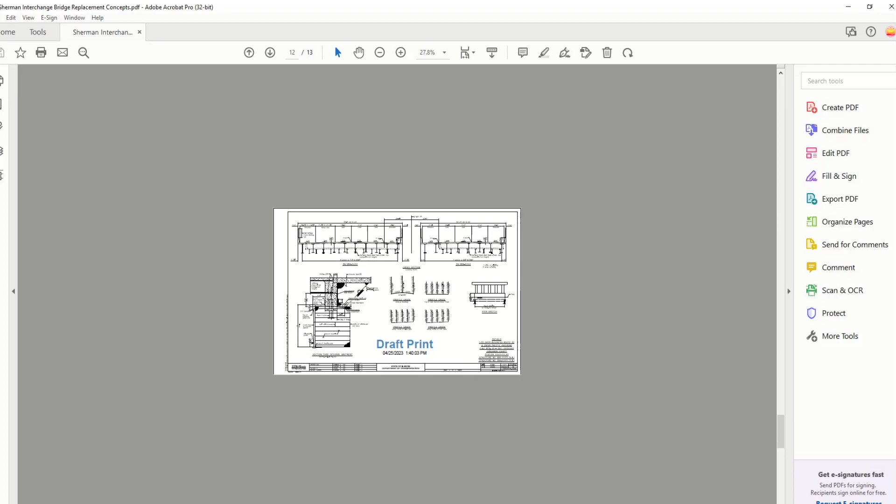And we can take a look at that here. As you can see, the railroad right-of-way is 50 feet wide on each side of the railroad, and you can see that the current plan is to place the piers in the same footprint as the existing.

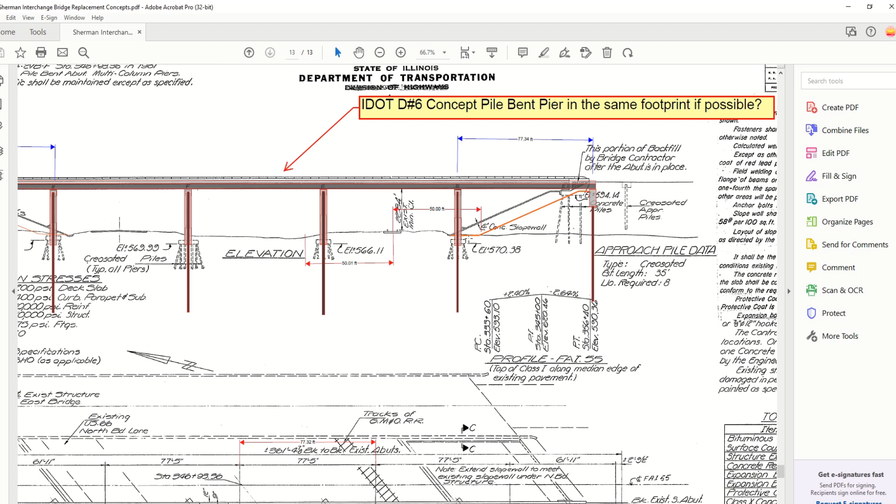The situation is that the railroad would prefer that the piers be off railroad right-of-way, and so IDOT needs to take a look at what that would take and what the impacts of raising that profile would be. And so in order to do that, we used the ORD software, modeled the entire interchange, including the main line, the bridge itself, and then the 3 interchange ramps.

We're then able to store a profile that gave us enough clearance above the railroad track to the low beam elevation, and we did a cost comparison. We're not looking at every single item. We're really just looking at the main impacts, and that main impact would primarily be the earthwork, the additional fill, the additional height on the retaining wall, and then the additional structure cost.

So let's take a look at how we went about that. What we did was we just took the existing profile, kept the same VPIs, which are near Andrew Road and Sudduth Road, and then we just increased the elevation to give us 3.25 of additional clearance. We kept the same vertical curve length.

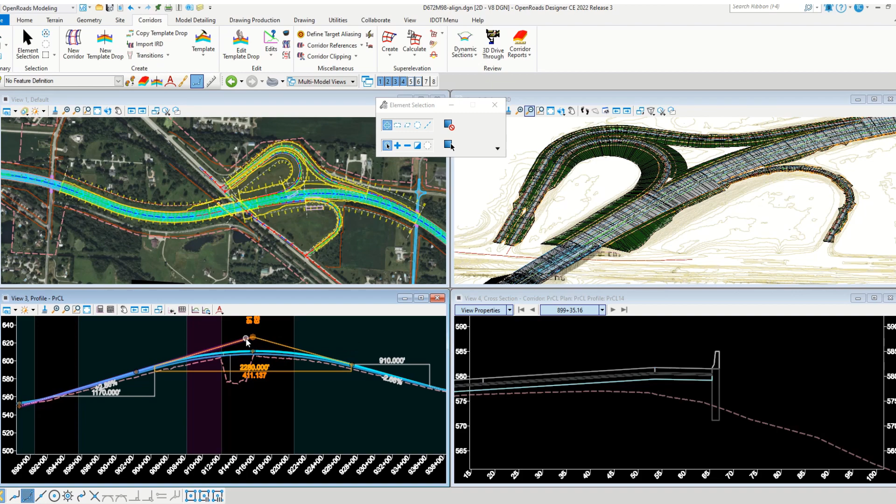We then make that the active profile, and then we apply our templates against that profile, which then produces a 3D model within multiple corridors, and then the corridors will give us the earthwork calculations. Okay, so let's take a look at the 3 or 4 templates that we used on this interchange.

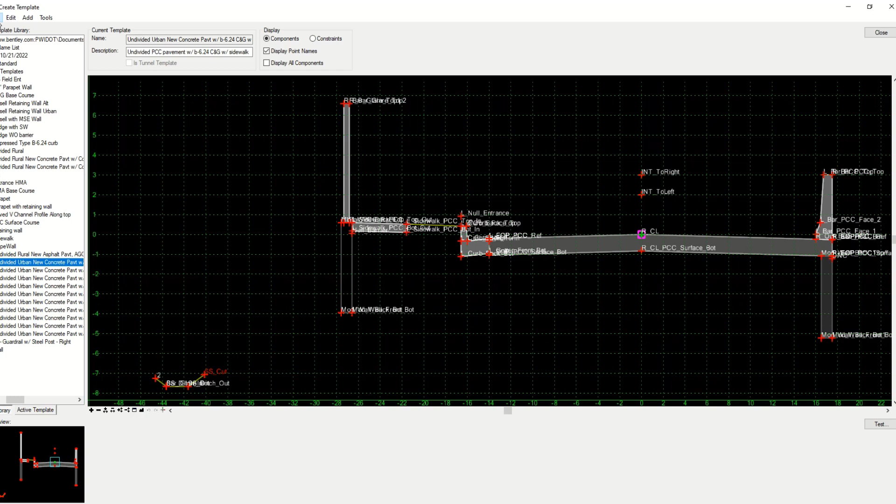Okay, so this is, actually that's our second corridor. Let's take a look at the first one. So this is the template that we applied against the first corridor. What we have here is the roadway PGL is located 17.5 feet from the center line.

So we end up with a total 16-foot shoulder, and then three 12-foot lanes, the first being 1.5%, the second 1.5%, the third then 2%, with the outside shoulder being 4%. The pavement type is PCC, 4 inches of BAM, and then we've got another 12 inches of subbase.

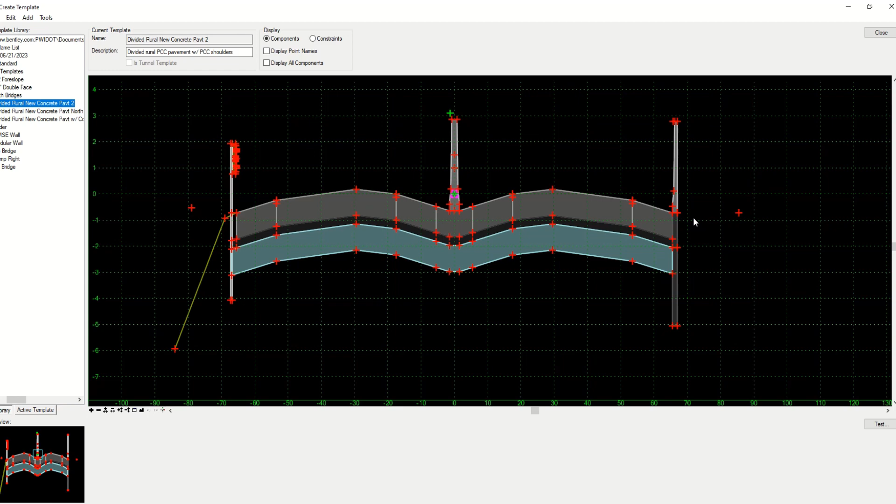On this first corridor, we've got an MSE wall, and that MSE wall targets the existing ground and then goes down an additional 3 feet. Let's see. The second template that we're going to be using is north of the bridge, does not contain an MSE wall, all the same widths. The difference being you've got this barn type foreslope

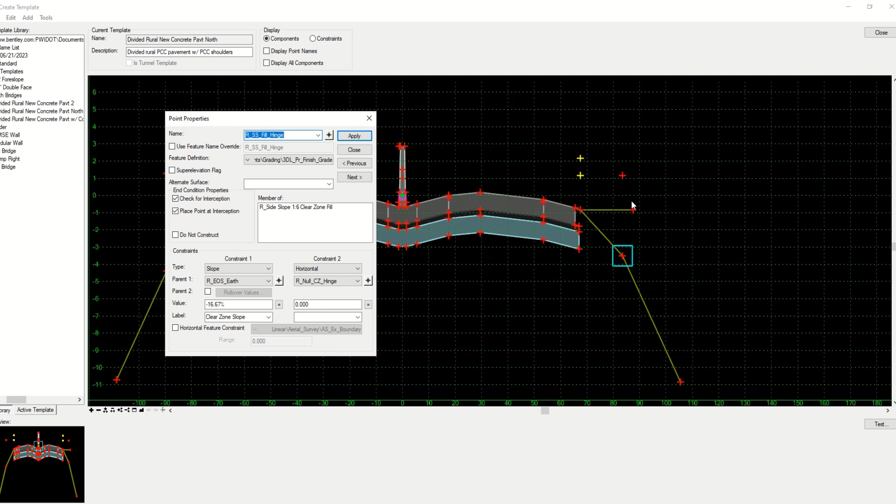where we go out at a 1 to 6, 30 feet out from the edge of pavement to the clear zone, and then we end up with a 1 to 3 down to the existing ground. We also have some additional pavement to handle the southbound entrance ramp transition.

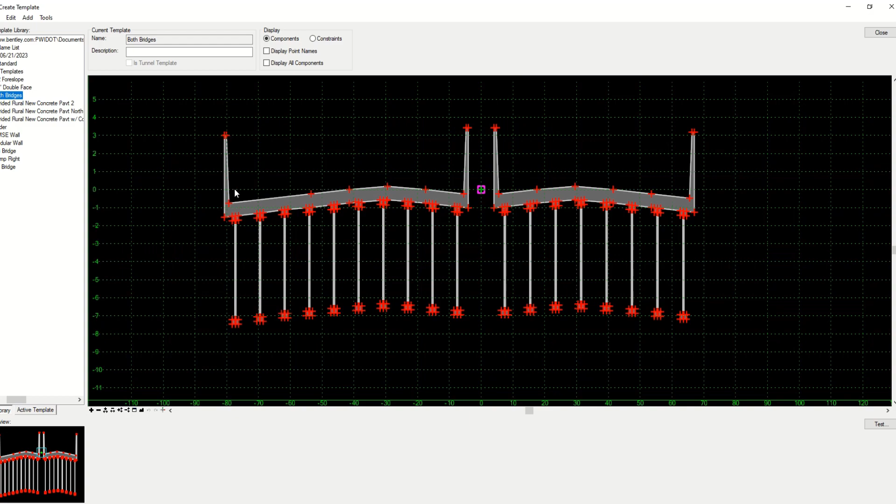We also modeled the bridges. The bridges are basically the same as the roadway. That inside PGL is 17.5 feet, the same as the roadway. There's no jog in it. Of course, the bridge has to be wider at the southbound entrance ramp, and so that's why you see this bridge on the left being wider than the one on the right. We've got a beam depth of 72 inches.

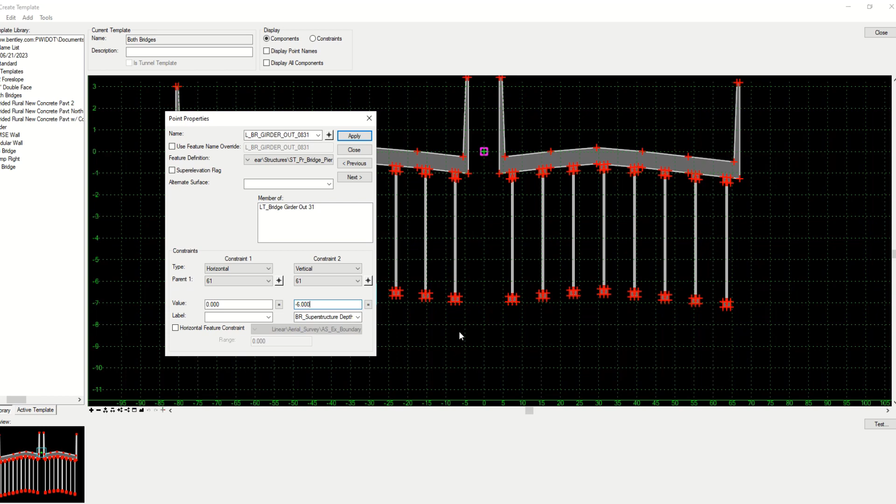And we're first going to run this against the corridors to get these quantities first, and then we'll come back, we'll change that to the 33 inches and adjust the profile.

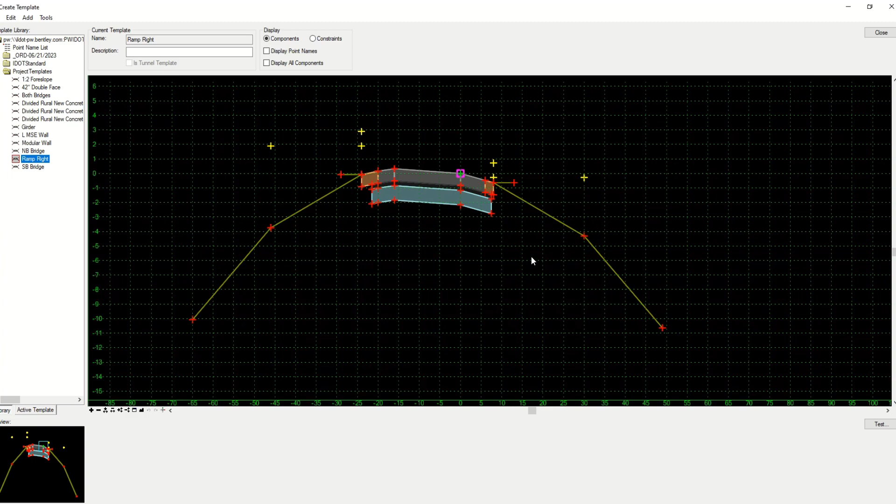And then lastly, we have the ramp template, and there we've got 16-foot pavement. We've got 6-foot shoulder on the inside. We've got 4-foot shoulder on the outside.

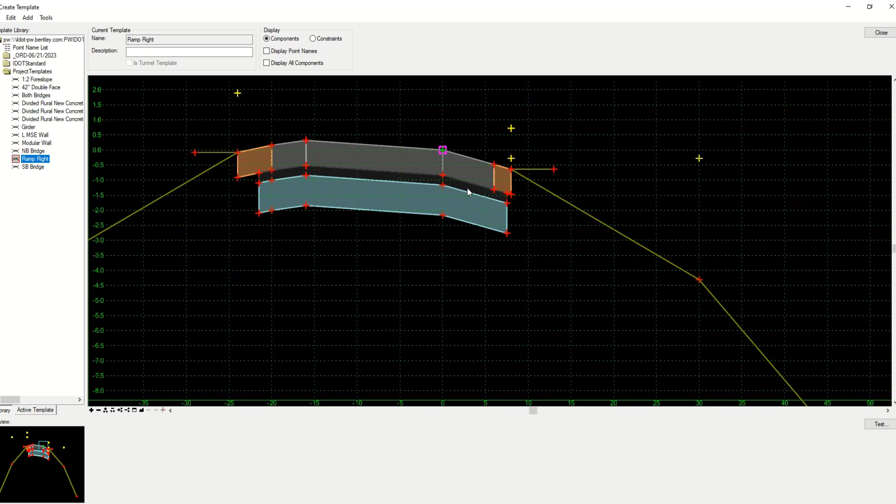And that's, like I said, 10-inch PCC, again with 4 inches of BAM, 12 inches of subbase. Again, we've got that barn style foreslope where we go 1 to 6 out to the clear zone, and then 1 to 3 down to the existing ground. So those are all the templates that we're going to use. So I'm going to close out of that.

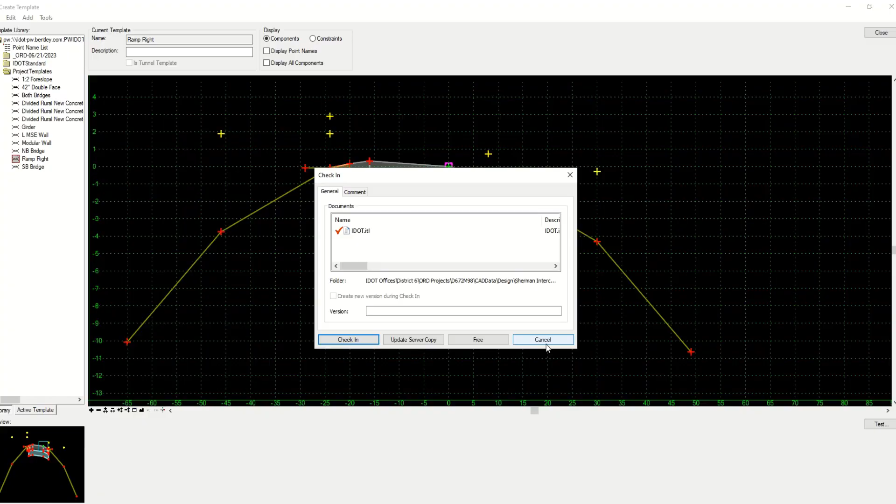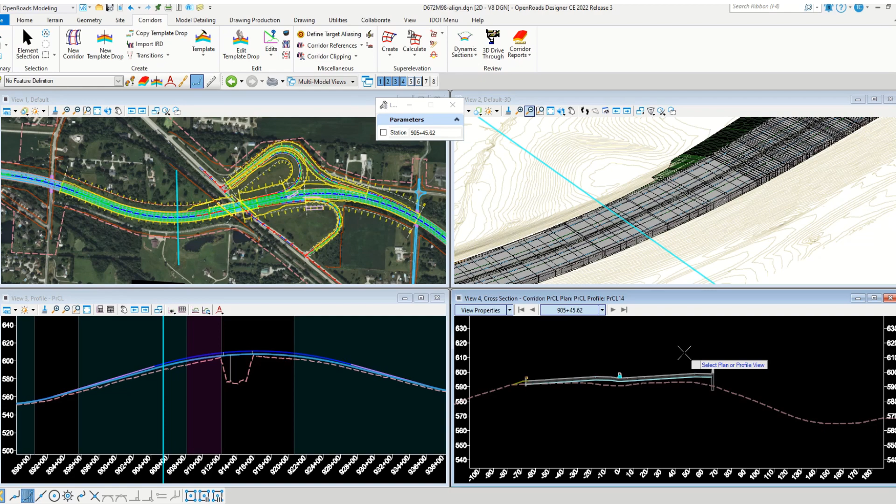And we'll just take a look at this very first corridor from Andrew Road up to the bridge. We'll move in and visualize a cross section somewhere close to the bridge. And you can see our situation here. Again, we're looking at raising that profile 3.25 feet.

So again, the top profile is the active profile, so that's what you're seeing here. That's that blue dot right in the middle. And then the inside edge of pavement that is 17.5 feet out is the same elevation as the PGL.

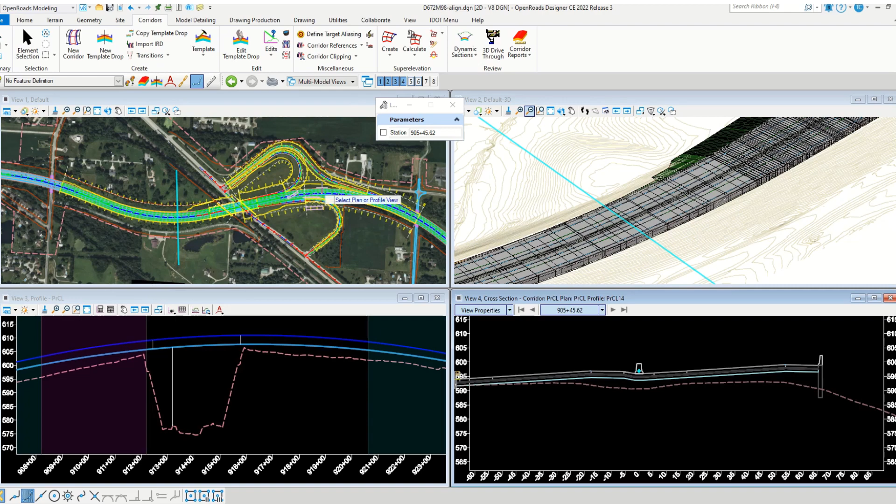So we go ahead and apply that template that we just looked at against the south corridor. And then after that, we ran our super elevation. Turn that on for a second here. The super elevation. This is the north one anyway. And we calculate our supers, which includes both the pavement itself plus the rollover for the shoulders, and includes transitions.

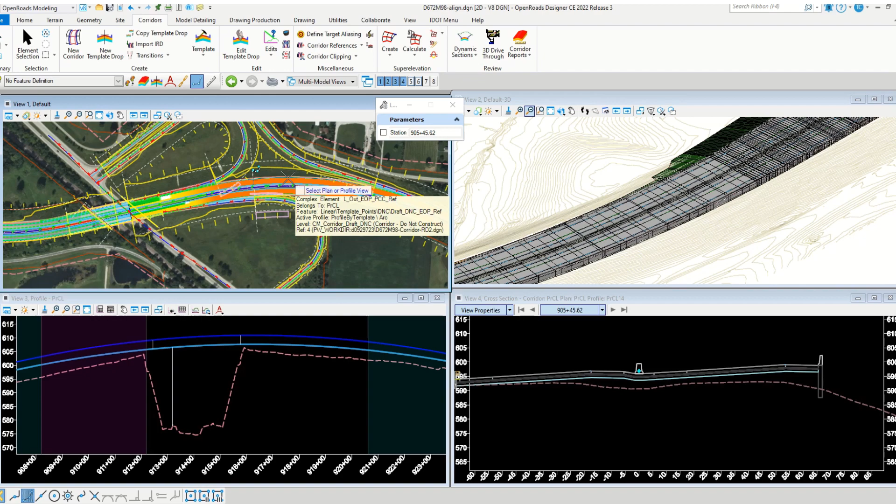So given this radius and design speed, we ended up with a 6% cross slope at a 75 mile per hour design speed. Okay, so let's take a look down here at the cross section, and you can see that in the model up above. There's the MSE wall.

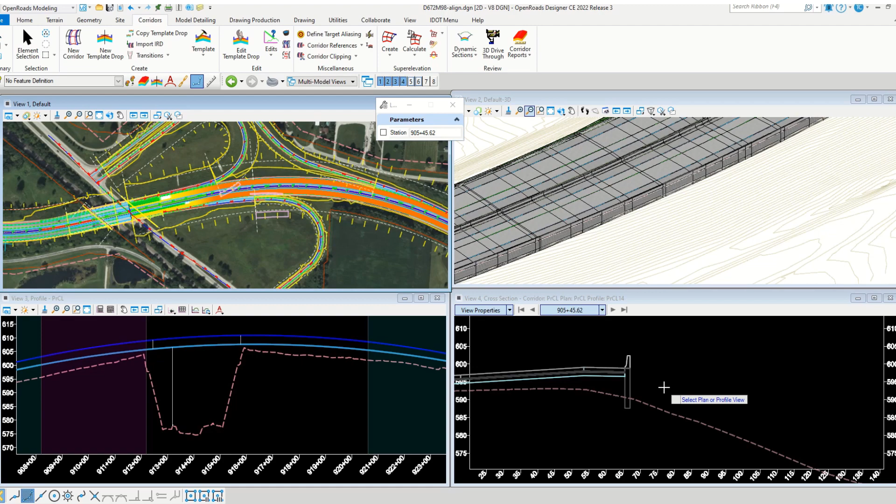You can see with raising the profile, we end up with an MSE wall height of, at least at this station, what do we have here? We'll measure that. So 11.2 feet. So that's, again, much higher than the other profile.

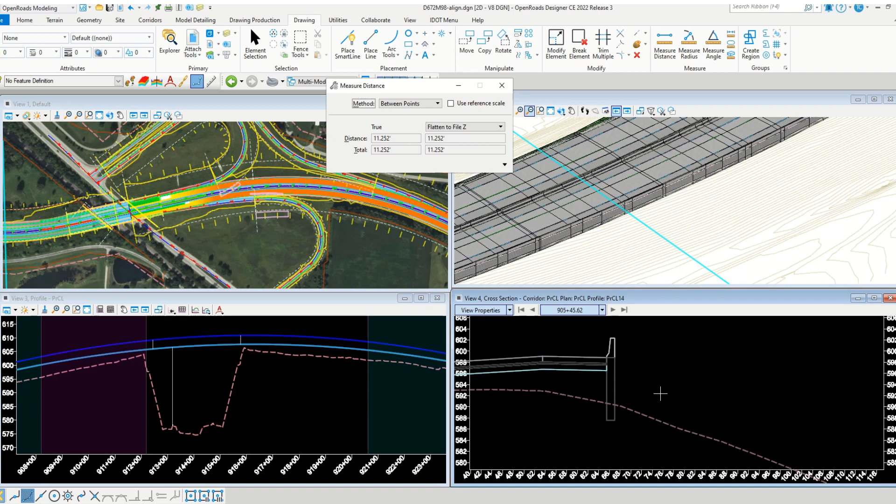So that's part of where that additional cost is going to be, in all this additional fill and then the raising of the MSE wall. And that MSE wall runs almost all the way to Andrew Road and then ends at the bridge.

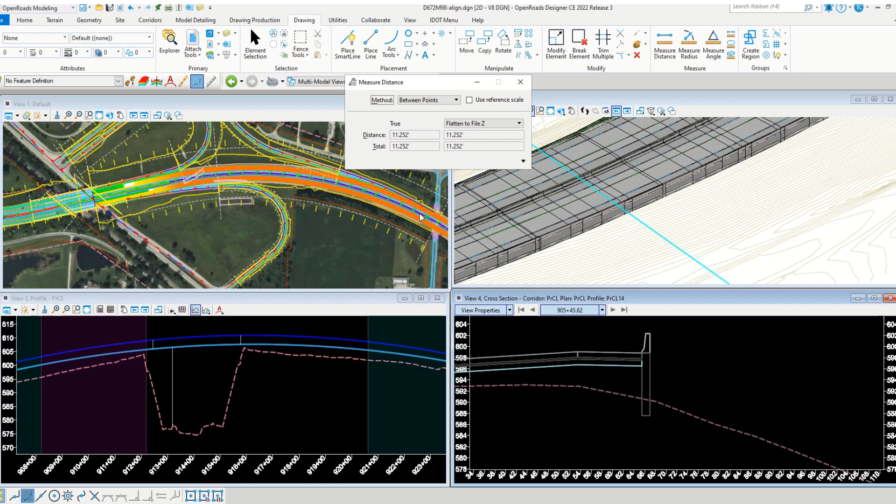And so then what we do, once we've processed this, we can just go into our corridor reports. We can select that full corridor, and that will give us our volumes, so our cuts and our fills. And you can see in this case we got 5,500 cubic yards of earth excavation and 43,000 cubic yards of furnished excavation. So we plug those into our quantities, and we'll come back to this later.

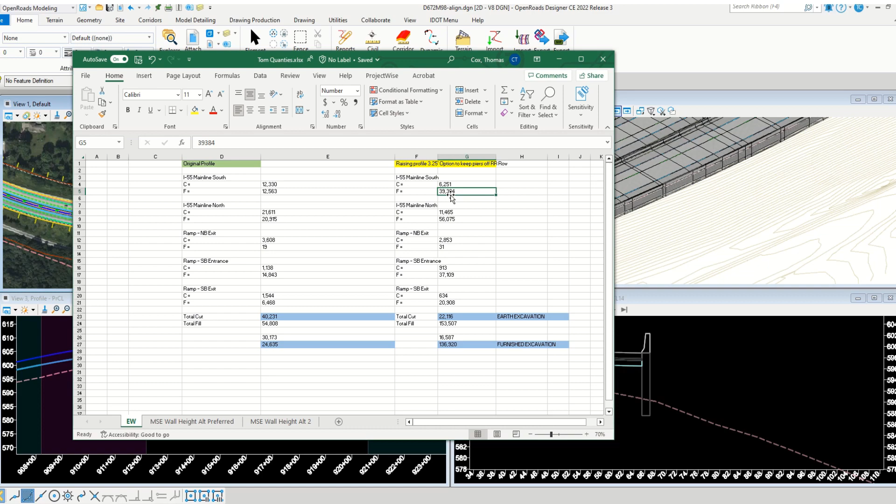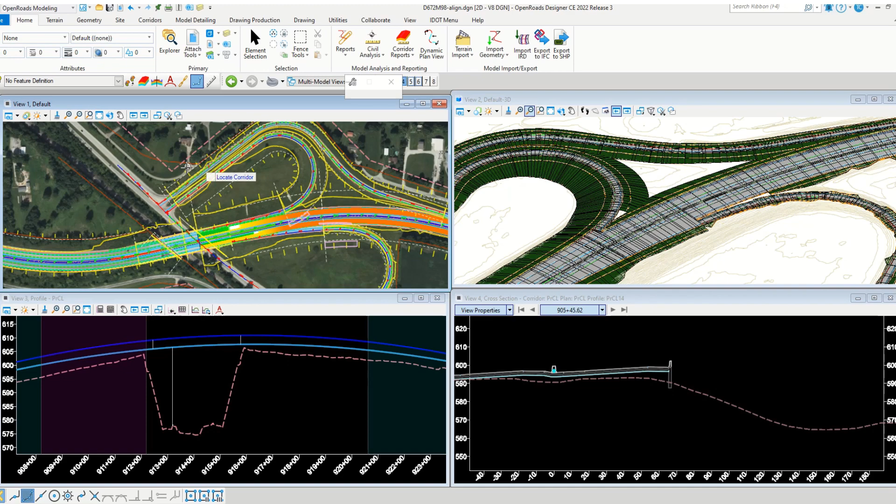Okay, so that's how we go about calculating our quantities. Again, as far as the impacts go, let's take a look at these ramps real quick here, because really that was a big part of the impact, not just the main line, the additional fill that's required here. Let's take a look at the southbound, both entrance and exit ramps. We can go ahead and visualize a cross section on those ramps.

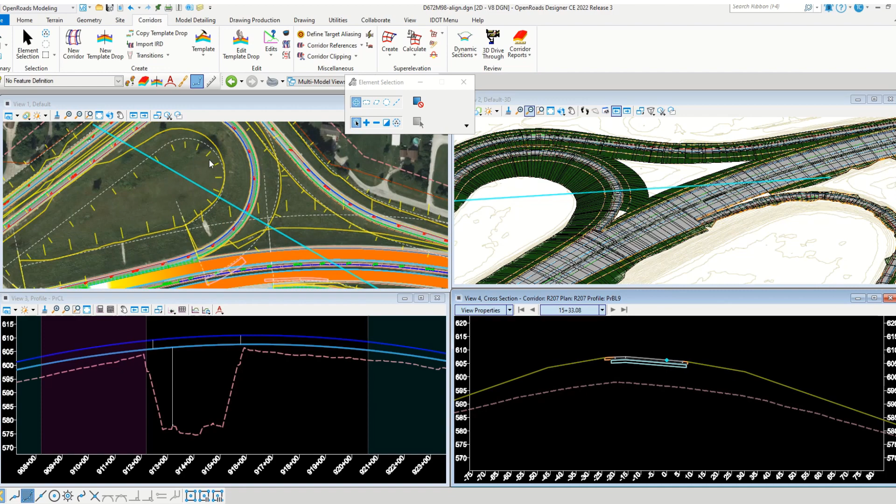And then if we look at the ramp somewhere close to the main line, you see how high the ramp would need to be. And let's also take a look at that ramp profile to see why it needs to be so high and why we need so much additional fill at this location.

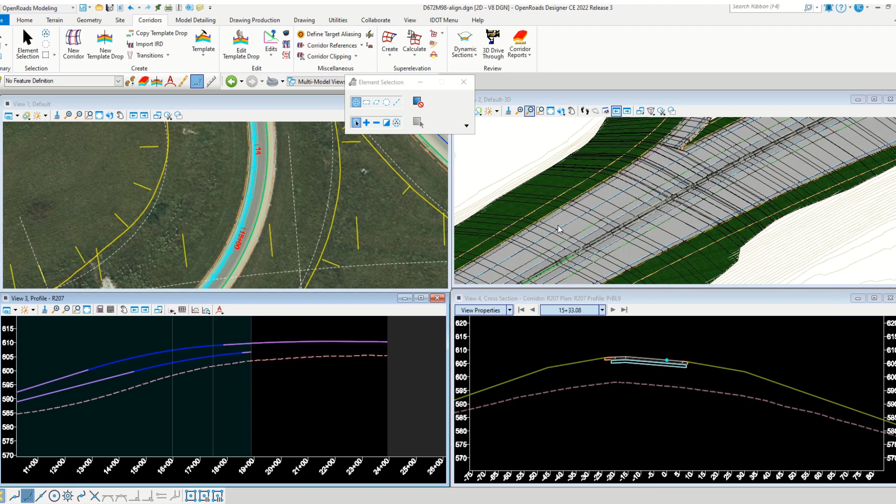Okay, the profile on the top is, again, what it takes to raise the profile on the main line, 3.25. So that's what you're seeing over here. And like I said, it's also taking into account the superelevation that is required on this curve. So in addition to the 3.25 feet, we still get a little bit more height because of that superelevation and the breakover.

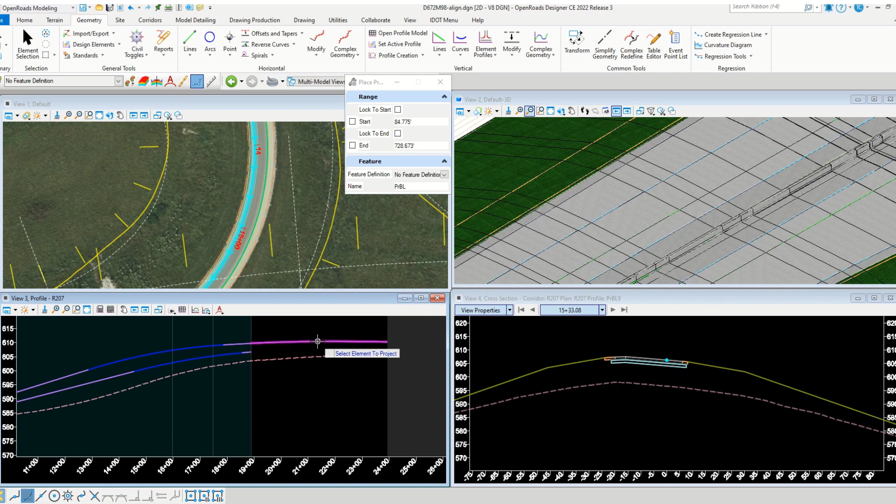But if I was to take this inside edge of pavement, what I can do here is go to my geometry tools and project this edge of pavement onto this profile, and that's what we're seeing here. So it projects that profile, and then what I do to get tied back in to finish that ramp profile is I just extend a tangent line, which I've got the tools to do here. From that profile, I extend a tangent line, and then I try to get tied back down just as soon as I can.

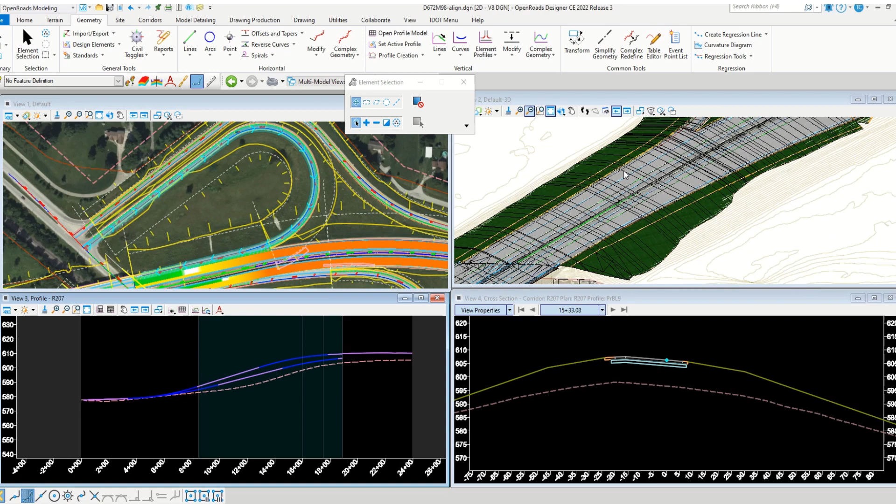Here we end up with a 3% on the ramp; currently I've got a 500-foot vertical curve. We can tweak that a little bit as needed, but to get good quantities for what we're looking at right now, this is more than enough as far as the level of detail and degree of accuracy. There can be a little bit of tweaking, but it really gives us, looking at the concept in this way of modeling an interchange, pulling those quantities, and then getting that total quantity,

and that's with all the corridors, both the corridor on the south side of the bridge, north of the bridge, all three ramps. Then we get our total cuts and fills for each one of those. And then from that, we can look at pay items required, because that's how we're going to figure the cost, and that's going to be based on the earth excavation pay item and the furnished ex pay item. So let's just take a look at these two real quick.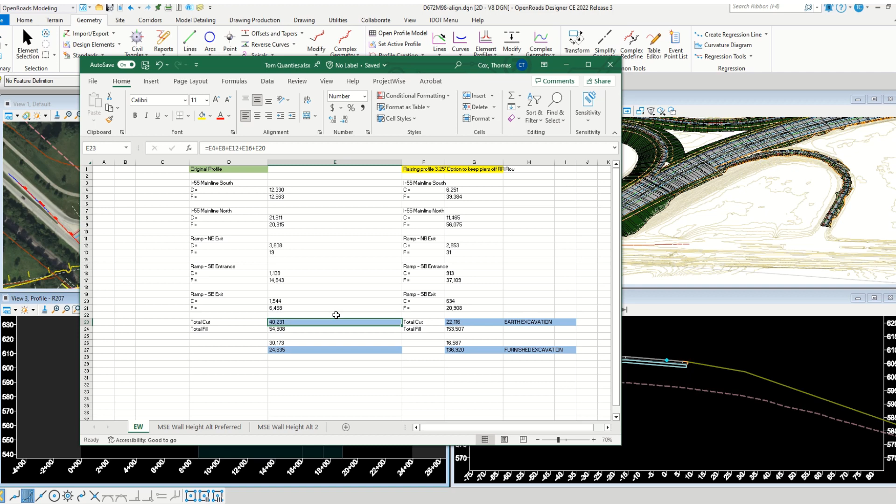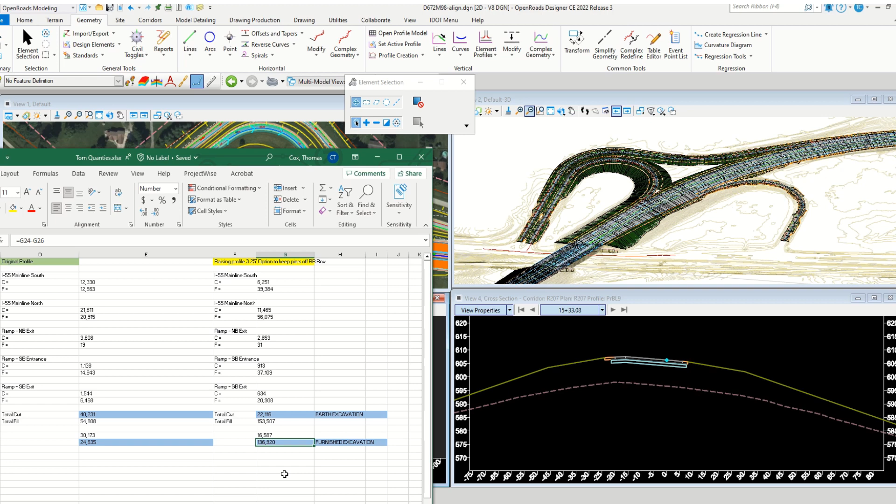You can see that with the first profile, which again is very close to the existing profile, the earth excavation and the furnished ex pay items are relatively small. Actually, the earth excavation is a little bit greater than raising the profile, but where really all the cost is, and you can see this huge difference in the furnished ex, that additional fill to raise the mainline roadway and the ramps ends up being 136,000 cubic yards.

And so when you look at the additional cost, what we do is we just take that 136 minus the 24. So you can see that we're looking at well over 100,000 additional cubic yards of furnished excavation, at a minimum of $30 per cubic yard. That's a substantial amount of additional cost just in the earthwork alone.

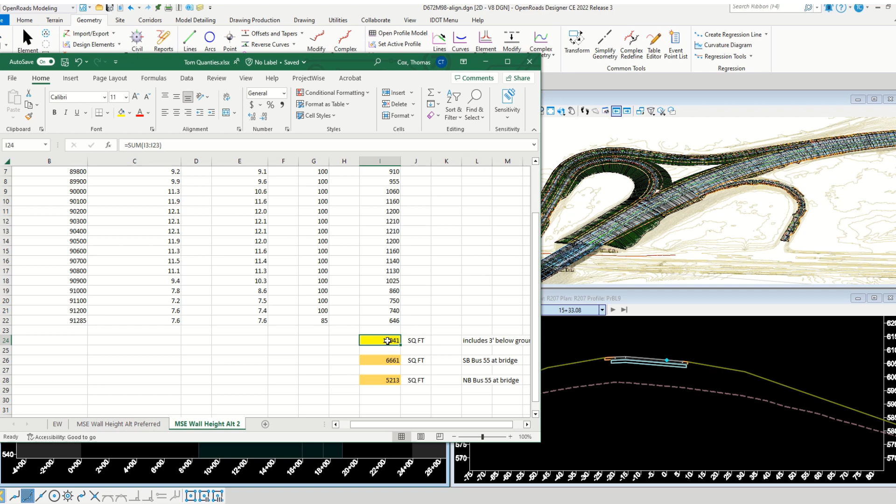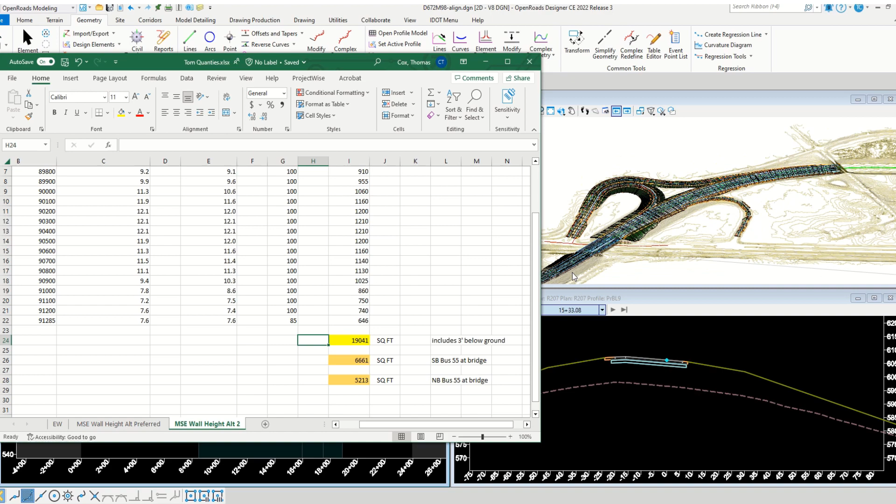Next, we compared the MSE wall height, and with the lower profile, the original profile, we end up with 14,000 square feet of MSE wall. Raising the profile adds an additional 5,000 square feet, and in addition to that, because of the structure type, you also end up needing MSE walls down along Business 55. And so when I look at the quantity of each of those MSE walls and get that total, the 5,000 difference plus the 6,000 plus the 5,000, again, you can see we have a substantial amount of additional quantity and cost of the MSE wall.

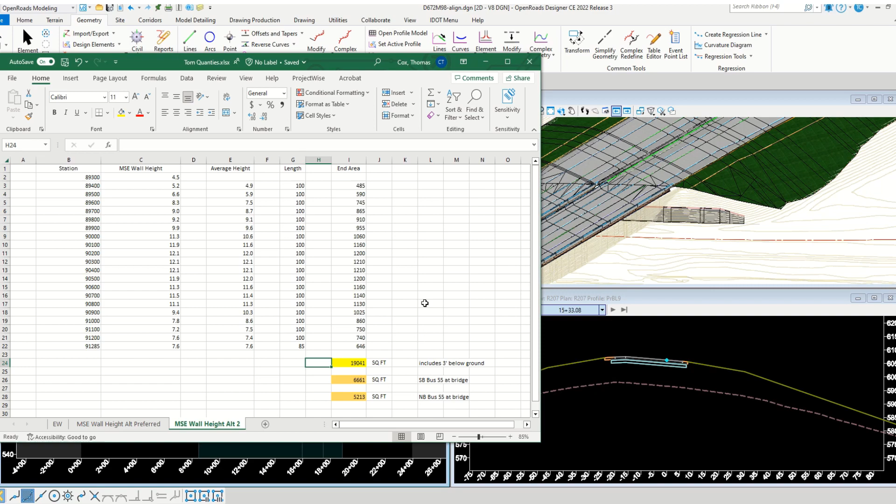The last big item that we have not looked at yet, that we're getting ready to look at next, would be the additional cost of the structure with going with the 6-foot girders versus the 33-inch beams. And so we'll see what that total cost difference is. But for this portion, the roadway portion, this is just a quick demonstration on how we used the ORD software to do a cost comparison against those two alternates in a very efficient period of time.